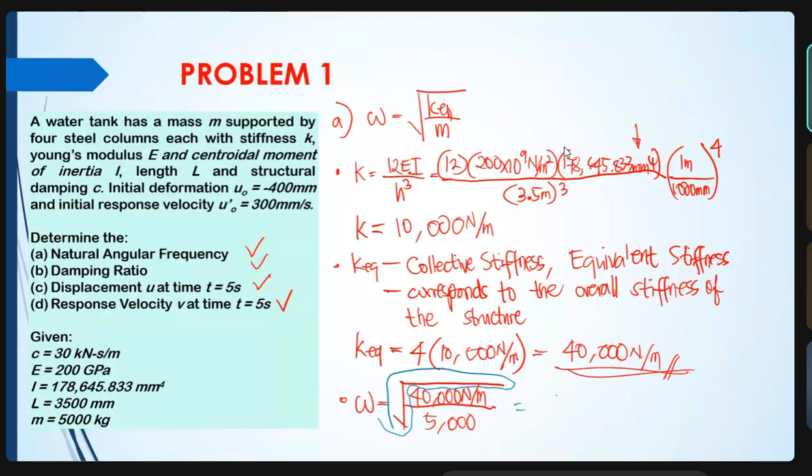So omega is actually the same as what you solved. But some of you got this wrong. Please be mindful: some forgot to take the square root, which is wrong; they only included the inside. So their answer is 8. The correct answer for this one is 2.828 radians per second, just like our previous discussions.

And then next we have the damping ratio. Here in the damping ratio, there were still many mistakes. So let me reiterate that when we say damping ratio, from the word ratio, we are referring to the ratio of the structural damping over the critical damping. C is the damping of the structure, and CC is the critical damping. Some of you solved for C. The C is our damping, also called damping coefficient, and sometimes structural damping. We write this down so others will notice. Another term is structural damping.

Or it may also be called a percentage of the critical damping. It depends on the problem. You may have noticed problems with 5% critical damping. So it represents the damping. When we say ratio, that is the ratio of damping with respect to the critical damping. So for our psi, let's take first the critical damping. Our critical damping is 2mω.

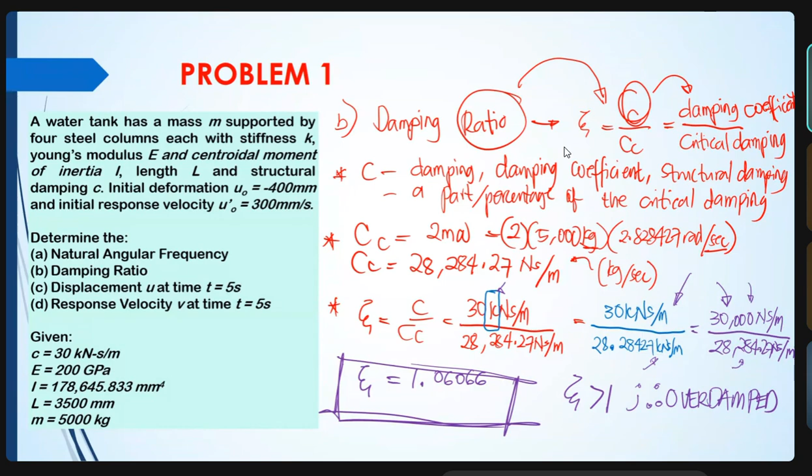So we need to use the equations depending on the type. So the condition of the structure is overdamped.

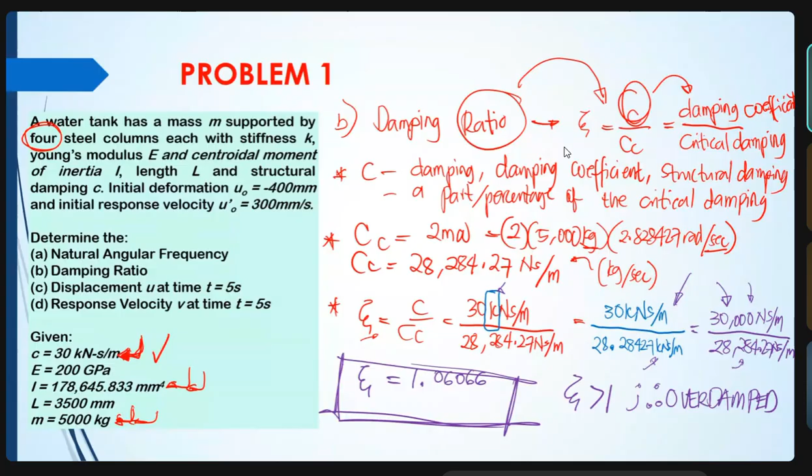So since this is an overdamped structure, our U is equal to 1/2 times (U naught plus (U dot naught plus U naught psi omega) over omega square root of psi squared minus 1) times e to the omega t square root of psi squared minus 1, plus 1/2 times (U naught minus (U dot naught plus U naught psi omega) over omega square root of psi squared minus 1) times e to the negative omega t square root of psi squared minus 1.

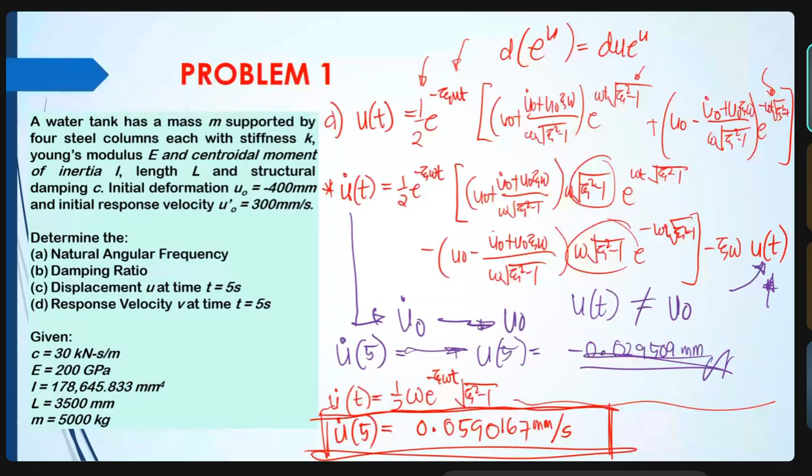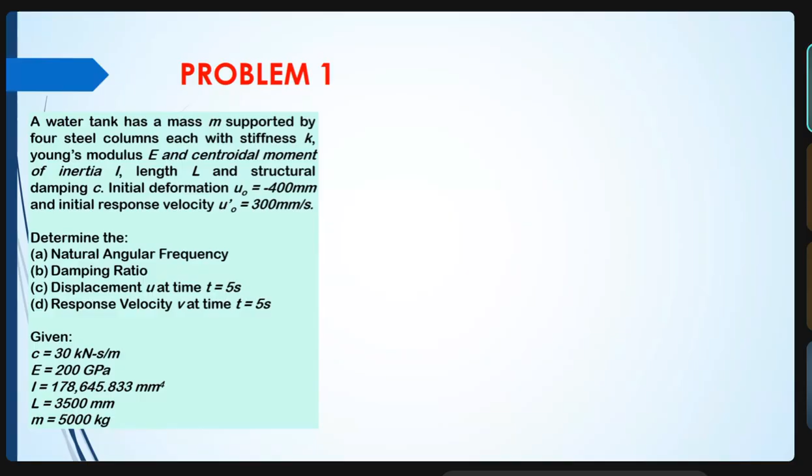Okay, so yeah, mao na siya. I think everybody has understood this part. Okay, so let's move on. Let's move on to our next. This is one of your previous assignments. Wait lang. Okay. Let me just change this one.

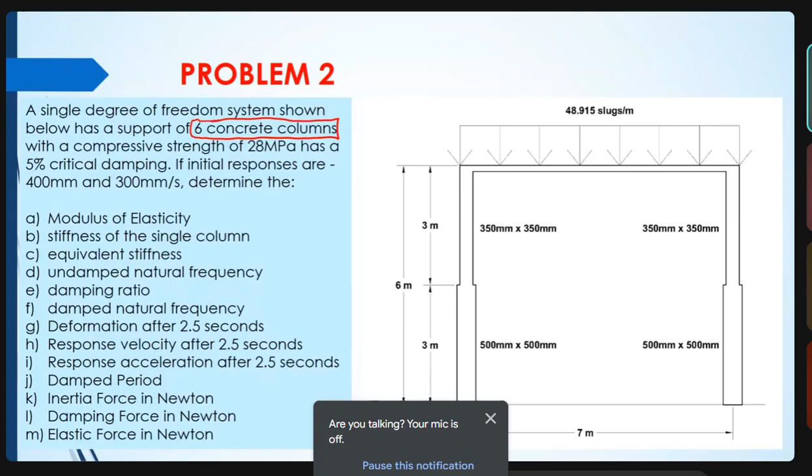Thank you so much. Thank you, Ms. Langinaw. Sorry about that one. Let's continue now with our discussion. Let me just erase this here.

Okay, sit down. So in our previous discussions and examples, we have used steel columns. So karon, we have already started using concrete. We have a concrete structural system here, and in this example, we have six concrete columns. So actually, this is one of your assignments, right?

Naanad mo sa steel columns nga naay thickness or hollow. However, like most of the time, the concrete columns and the concrete beams are solid. So if you look at the label, we have 350 by 350 millimeters. So, you're going to read this one.

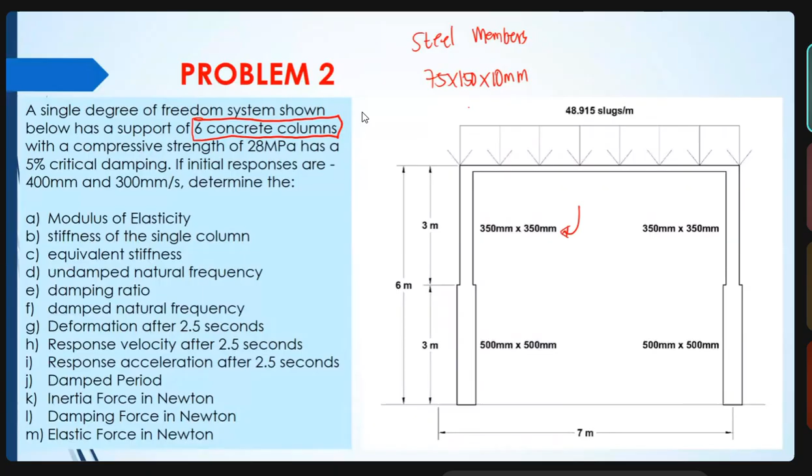Diba in the steel members, when we say 75 by 150 by 10 millimeters, this is the length, the width, and then the thickness. So we may imagine that that is a rectangular steel having a dimension of 75 mm, 150 mm, and a thickness of 10 millimeters.

We were also given in the previous one a 200 diameter by 10 millimeter. It means that we have a circular steel column and its thickness is 10 millimeters. So for this one, looking at the label, 350 by 350, this is a square having a dimension of 350 millimeters by 350 millimeters. Same as well this one.

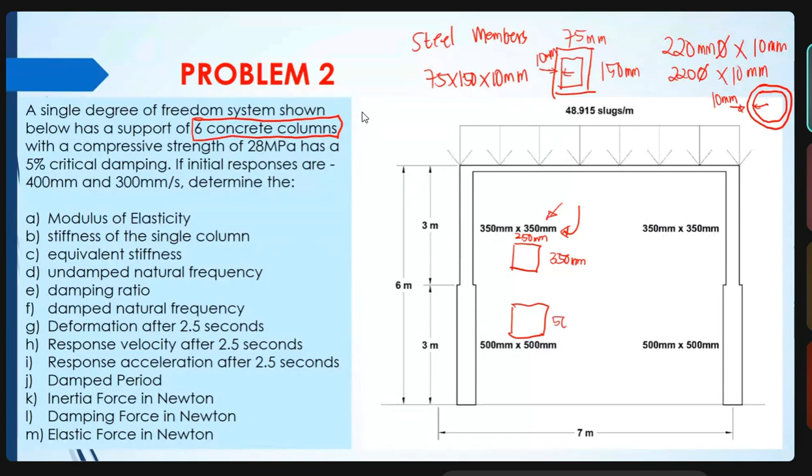500. So we have a compressive strength. The compressive strength is very important in calculations if we have a concrete structure because it will be our basis for the modulus of elasticity. And this one is 5% critical damping. We are also given an initial response of negative 400 millimeters and 300 millimeters per second.

By inspection, the units are in millimeters and millimeters per second. There is no explicit mention that the 400 is the displacement and the 300 is the velocity. Just by looking at the units, you can tell if that is a displacement or the velocity. So, everything is already there. We have the dimension of the column, the damping, and our initial responses.

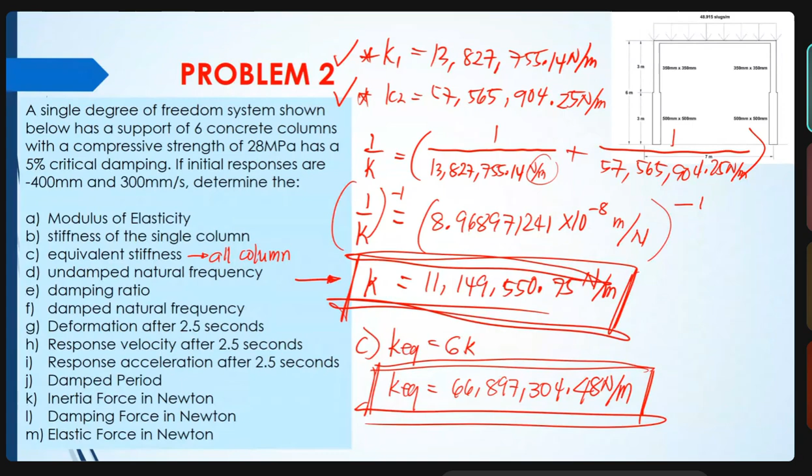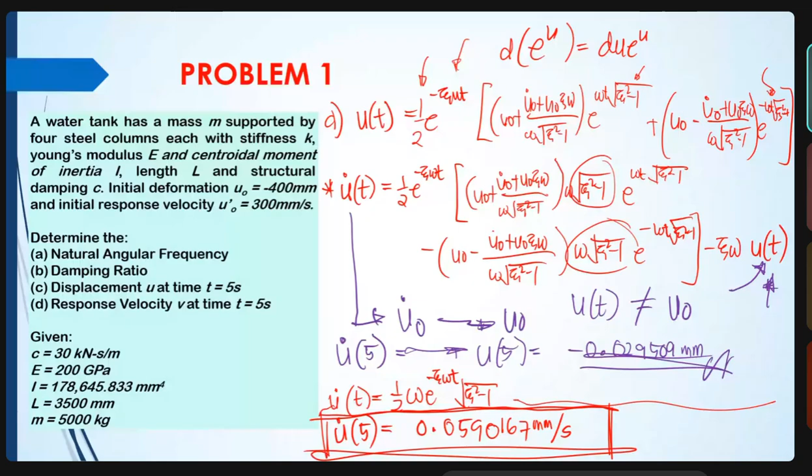So we have our KEQ. Let's solve our natural frequency. Again, the natural frequency is just the square root of the equivalent stiffness over the mass. For the mass, balik ta sa first. The load given on top is 48.915 slugs.

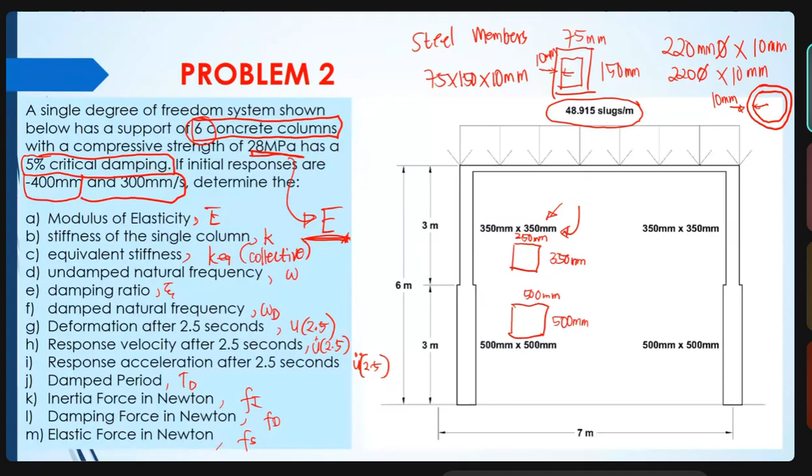These slugs is not an SI unit. This is an imperial unit. So, we will convert it. We have a given uniformly distributed load of 48.915 slugs per meter. So to get the mass in English units, we just multiply slugs per meter by the length, which is 7 meters. So now 342.405 slugs. Since naka-slugs na, we convert into kilograms.

342.405 slugs. Okay. How many kilograms in a single slug? One slug is 14.5939 kilograms. Use your calculator.

So, you just multiply that, we will cancel the slugs. 342.405 times 14.5939, so the mass is 4,997.0243 kilograms.

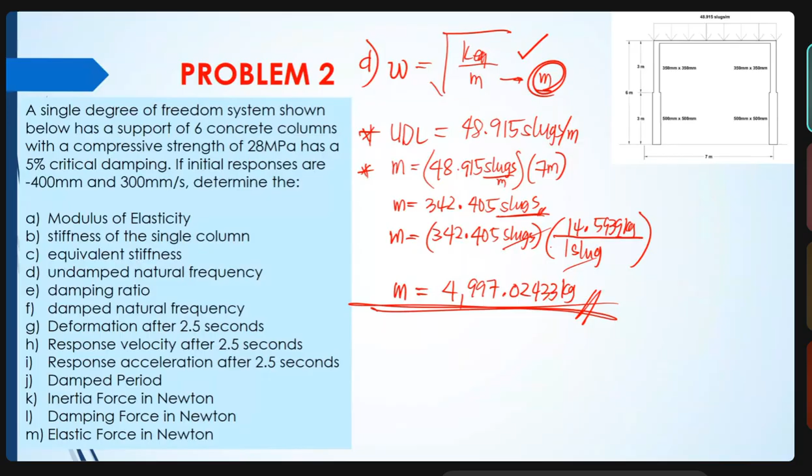So, we have our mass, stiffness. So, equivalent stiffness is 66,897,304.48 Newton per meter, over the mass of 4,997.02433 kilograms. Our omega is equal to 115.704054 radians per second.

Okay. After the natural frequency, we find the damping ratio. So this psi is equal to C over CC. It's given as 5% of critical damping. So the damping ratio is 5% or 0.05. It's already given.

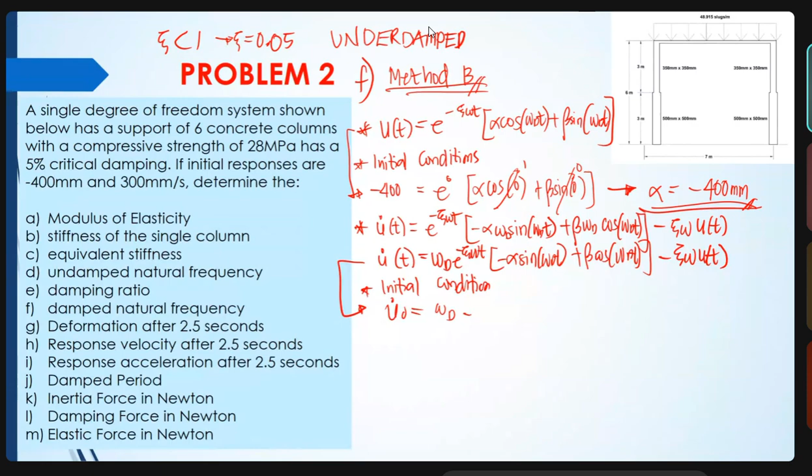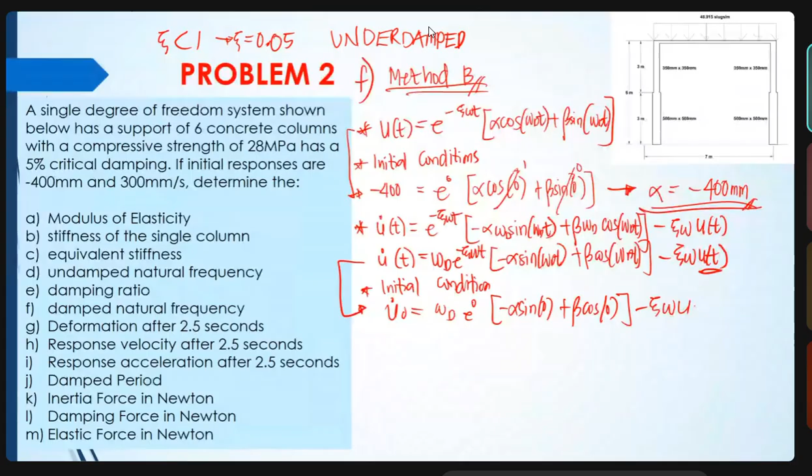We apply the initial condition to the given problem. At time equal to 0, our response velocity is 300 millimeters per second. U dot naught is equal to omega d e to the 0, negative alpha sine of 0 plus beta cosine of 0, minus psi omega u naught. This should be u naught, not u dot.

Don't forget about the units. By the way, the beta is not always in millimeters. It depends on the type of the system. Okay, so we have our alpha and beta, then we can now get u of t, our displacement, the velocity, and also the acceleration after 2.5 seconds.

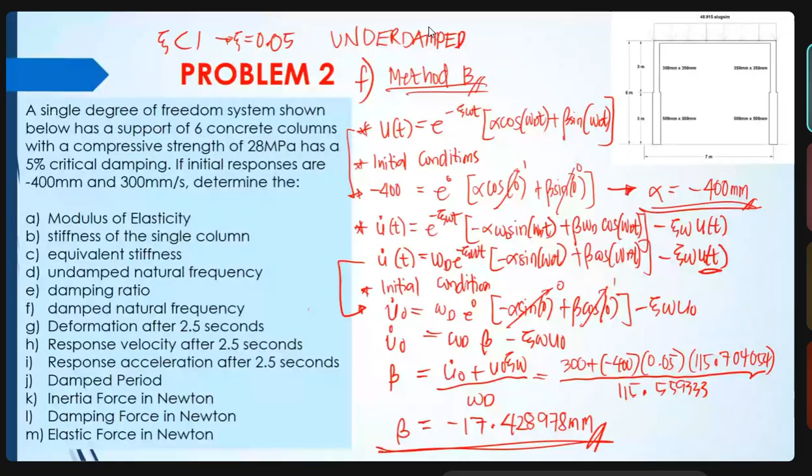To simplify, we have the psi omega t, which is 0.05 times 115.704054 times 2.5 seconds, that's 14.463007. And omega d t, which is equal to 288.8983 radians. Then we have our alpha, which is negative 400 millimeters, and beta, negative 17.428978 millimeters.

We just substitute everything. u of 2.5 is e to the negative 14.463007 times negative 400 cosine of 288.898333 plus beta 17.428978 sine of 288.898333. Sorry, this is not 14, but 288.898333. The deformation at 2.5 seconds is negative 0.000206 millimeters.

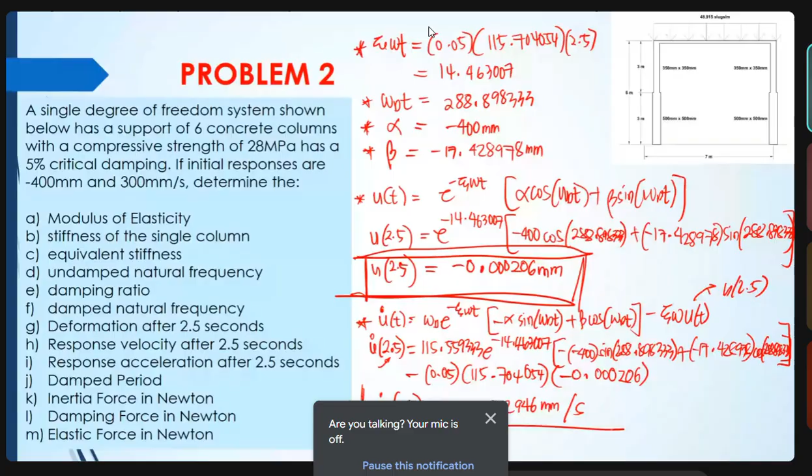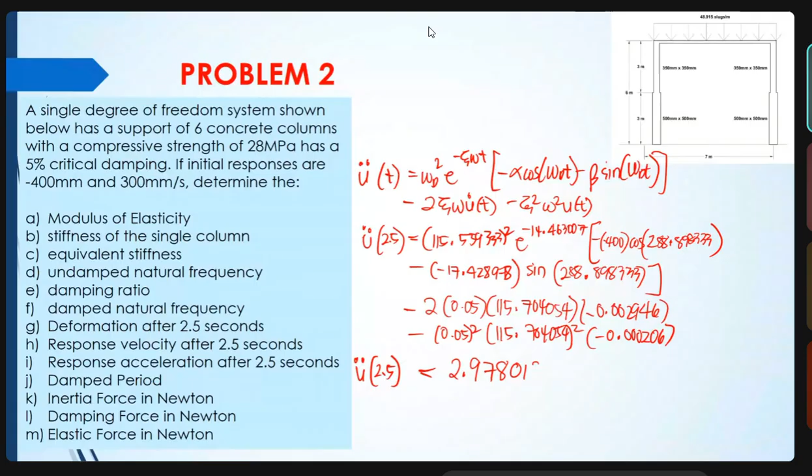Response acceleration is 2.97801 millimeters per second squared. Okay.

We have already all our responses. So next we have the damped period today. The damped period is just equal to 2 pi over omega d, where omega d is 115.559333. So our damped period is equal to 0.054372 seconds.

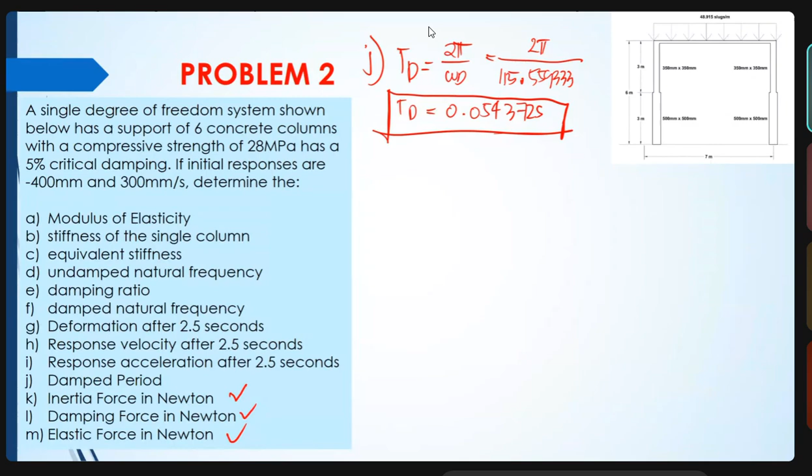And now we have the inertia force, damping force, and the elastic force. If you remember, these are the restoring forces acting on the structure. So again, the inertia force is just equal to the mass times the acceleration.

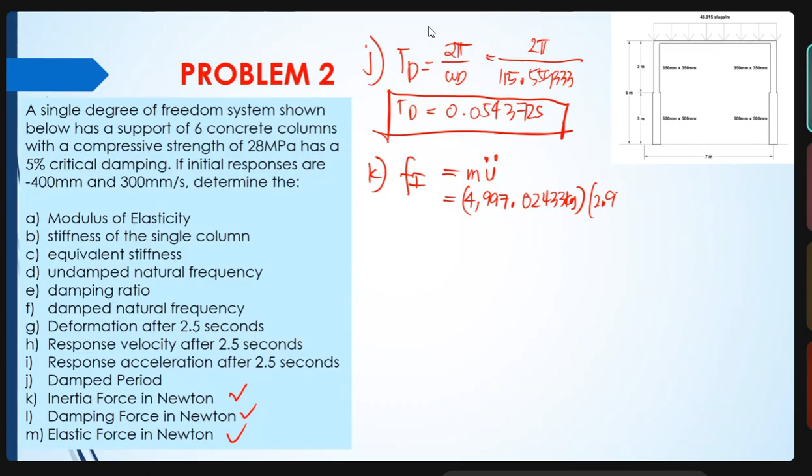Our mass is 4,997.0243 kilograms. Then our acceleration is 2.978012 millimeters per second squared. Since this is in millimeters, we convert using 1 meter per 1,000 millimeters. And we get the inertia force, which will be 14.881198 and the unit is...

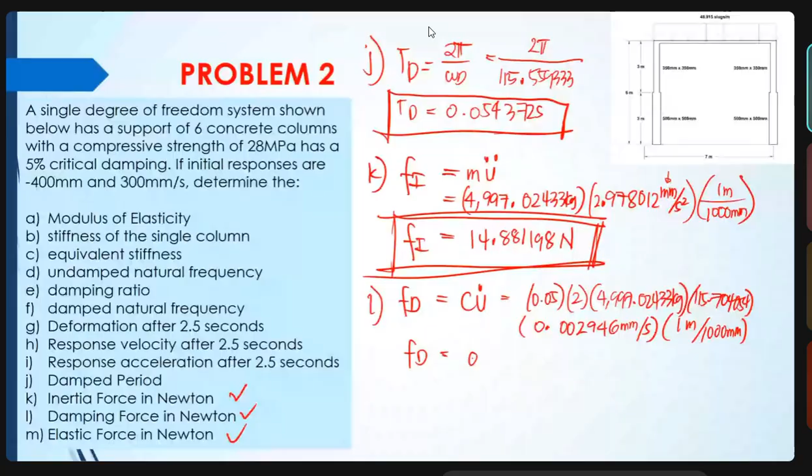Our damping force is just C times the velocity, and our C, we have 0.05 times 2, we have 2 times the mass, omega is 115.704054, and our response velocity is 0.002946 millimeters per second. Again since it's in millimeters, we convert that. So our damping force is 0.170331 Newton.

And our elastic force, that is just K times U. If you remember, our initial equation is the mass times acceleration plus C u dot plus K u is equal to 0. And we know this is the inertia force, this is the damping force, and this is the elastic force.

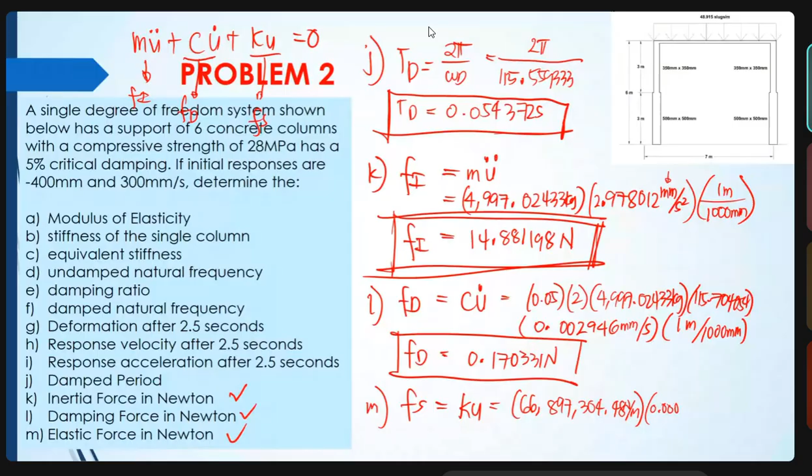Our K, or the equivalent stiffness, is 66,897,304.48 Newton per meter. The deformation is 0.000206 millimeters, again for the units. And our elastic force is equal to 13.780455 Newtons.

And then we take the stiffness of the column, and then consider the moment of inertia or dimension. So what we do is we get the equivalent stiffness of one column for the column, with its own stiffness, and afterwards we get the equivalent stiffness, and then the damped natural frequency.

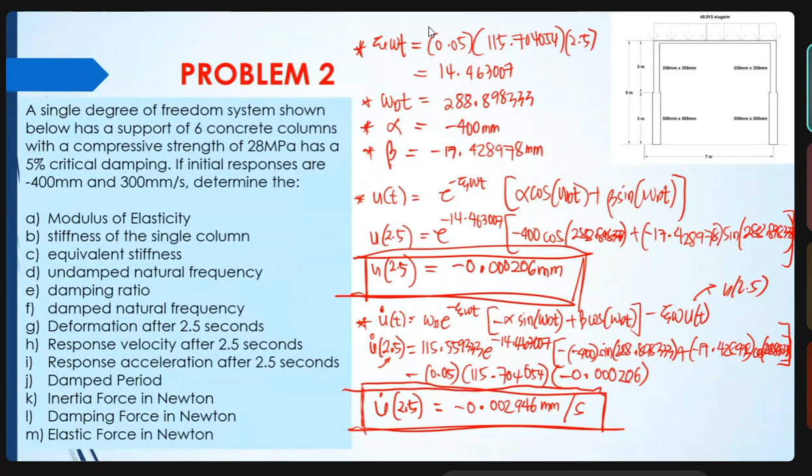So we're able to get our U or deformation at 2.5 seconds, and our response velocity. When you take the U and U dot, they're negative. However, in our calculations of forces, we disregard that negative sign - we just take the absolute value.

Of the responses to get our forces. So we have our inertia force, which is just the mass times the acceleration, our damping force, which is the damping coefficient times the velocity, and our elastic force, which is just the equivalent stiffness times the deformation.

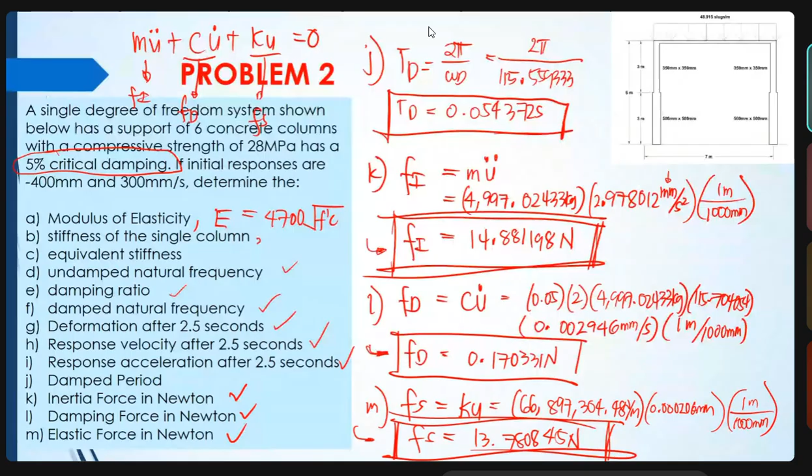So now the question in this topic is, if we can compute the responses, we can also compute backwards for the dimension - given a situation, we can find the height, find the size. Okay, so that's all for today. I told you, this is already beyond our 12 o'clock schedule.

Yes, Mr. Matikaw. Oh, sorry guys, sir. Not regarding the topic, sir, but can we still check attendance, sir? I'm a bit late, sir.